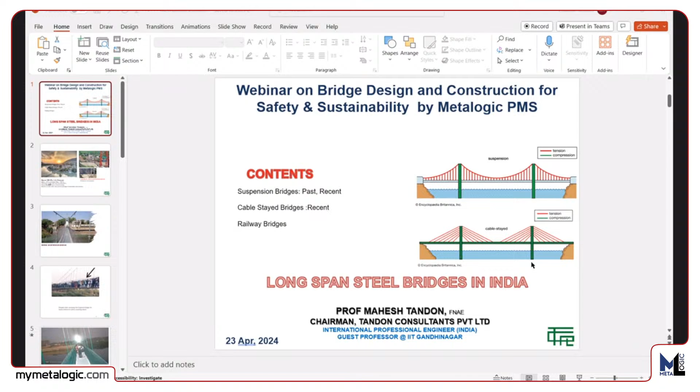So the first slide tells you basically what I'm going to talk about: some suspension bridges, past and present, cable stayed bridges of more recent origin, and of course a couple of railway bridges, which I think are of great value as far as webinars like this are concerned, because these are really outstanding structures in many ways.

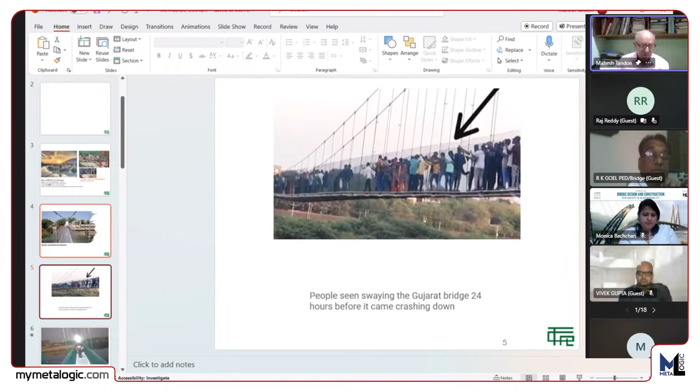It had already served its design life of about 100 years or more. This photograph was taken 24 hours before the collapse, because the bridge, which was under repairs, was opened only about 4 days prior to this. When you have a lot of people who don't realize that pedestrian bridges can't be played around with, you have to just cross the bridge and not play around with it.

Here's another group of youngsters, which you can see shaking the bridge. It is quite enjoyable for them, but it can prove to be a disaster, as it did in this case. This is a real live shot at the time of the collapse.

So why did the Morbi Bridge collapse? Probable reasons: corrosion of the main cable, fatigue of the same, and overloading. The present capacity that existed was 100 kilogram per square meter, which by today's standards is only about 1/4 or 1/5 of what bridges are designed for. But given all the problems that it had, even 100 kilogram per square meter probably was too much.

And of course, then there is the vandal loading, which I showed you, how the bridge actually collapsed with some youngsters trying to enjoy the swaying of the bridge. So that we call vandal loading. We cannot design bridges for that. It is difficult.

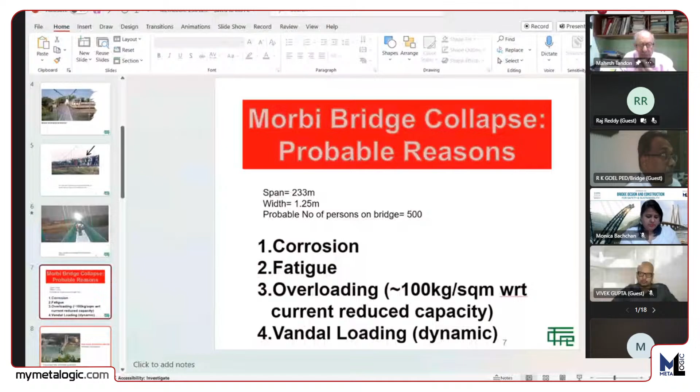The next bridge I want to show you is Ram Jhula Bridge, also in Rishikesh, Uttarakhand, constructed in 1986. The design is similar to Lakshman Jhula, located 2 kilometers upstream. The span is slightly larger, 230 meters, and the deck width is also larger, at 2 meters. The third bridge in Uttarakhand, Dobra Chanti suspension bridge, has a span of 440 meters, quite a big span, and a width of 8.25 meters, again quite large, and it is a motorable single lane bridge.

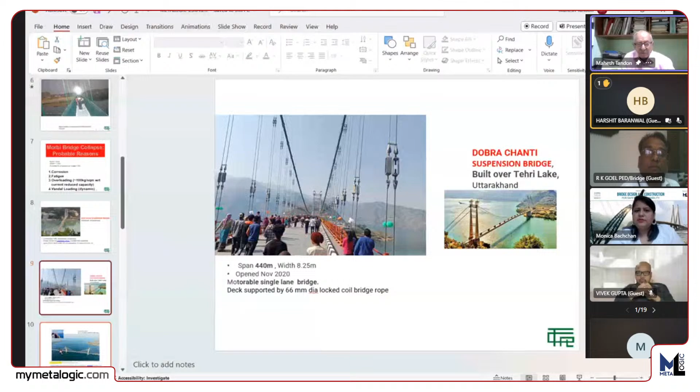As you can see, at the moment there are no cars or motorcycles or anything. It's basically pedestrians, but it is designed to be motorable also. So these are the three bridges I wanted to show you presently in Uttarakhand, and I think that when a bridge becomes close to its design life, it is better to close it down and treat it as a heritage structure rather than trying to extend its life and using it for other purposes.

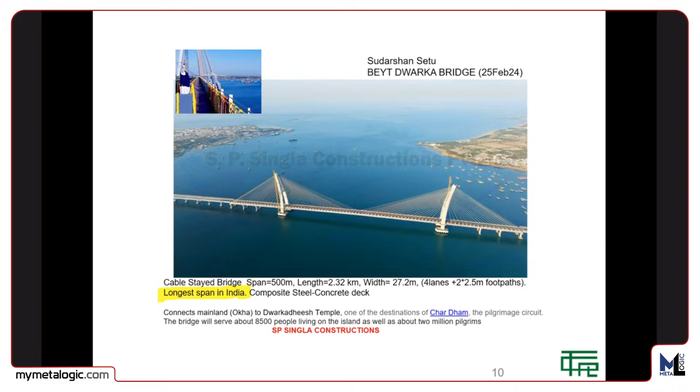Let's go to cable stayed bridges. This is the recently completed Beyt Dwarka Bridge, and you can see in the inset picture our Prime Minister waving out to the crowd, on the opening day. It is rechristened as Sudarshan Setu. This is the longest bridge span that we have in India today, 500 meters in length and 27.2 meters in width. So it's a 4-lane bridge with 2.5 meter footpaths on either side, because this is part of the pilgrimage circuit, what we call Char Dham. This is one of them.

The contractor, SP Singla Constructions, is one of the contractors who has made several long span bridges in the country.

I wanted to talk about what the deck is. All these bridges which have been constructed, particularly in India, have a composite deck. What does it mean? If you see on the right hand side top, there is a slide of the signature bridge in Delhi, which also had a similar deck. The picture below that, numbered 1, shows a grillage of beams as seen from the top, with a number of things poking out, as you can see from the grillage itself.

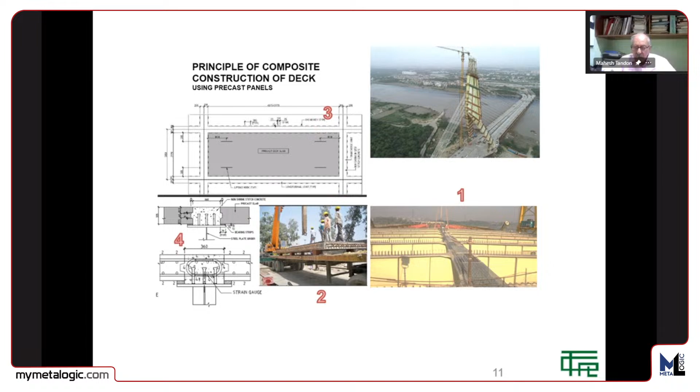The longest span is still under construction by the same company. This is the 6-lane, 700-meter span called the Delhi-Katra Expressway, which goes through Amritsar and so on. This is also one of the expressways which is going to be a sort of religious journey, with Katra coming there where you can visit Mata Ka Mandir. This bridge's construction has just started.

This is the old second Hooghly Bridge, which has a 35-meter wide composite deck. This is where cable-stayed bridges really started in India. When it started, it was a world record, but it took so long to construct that by the time it was completed, 3 more bridges had already crossed that span of 457 meters.

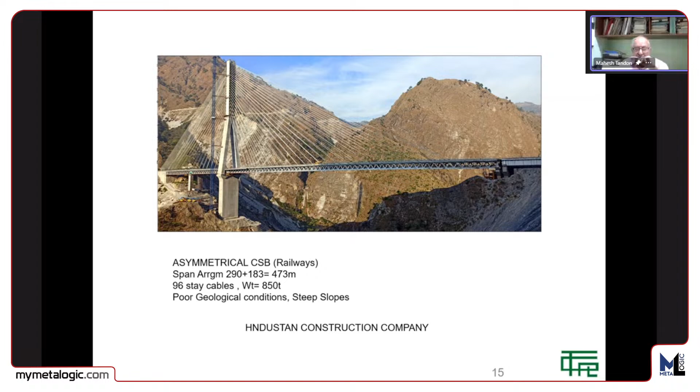I want to talk about 2 great railway bridges of India recently completed. This is an asymmetrical cable-stayed bridge, which has its biggest span of 290 meters, and the other span is 183 meters, with of course a support in between. The remarkable thing about this structure, apart from the fact that for a railway bridge this is quite a big span of 290 meters, is that poor geological conditions and steep slopes did not prevent railways from doing a wonderful job. The contractor was Hindustan Construction Company.

The last slide I want to show you is the Chenab Bridge, which I am sure you must have heard of. It is the world's tallest railway bridge, 360 meters tall up to the deck. If you compare it with other tall structures which we know well, the Qutub Minar, the Leaning Tower of Pisa, and of course the Eiffel Tower, which is 324 meters, you can see that it is dwarfed by the bridge itself.

This is a remarkable achievement. The way it was constructed was that it was cantilevered out, using a temporary stay cable at all times so that the arch could be completed. After the arch was completed, as you see in the last picture on the right hand side at the bottom, the deck was incrementally launched or push-launched from either end, and that is how the deck was made. This is again a remarkable structure, an achievement by the Indian Railways. The contractor was Afcons. Thank you very much for your kind attention.

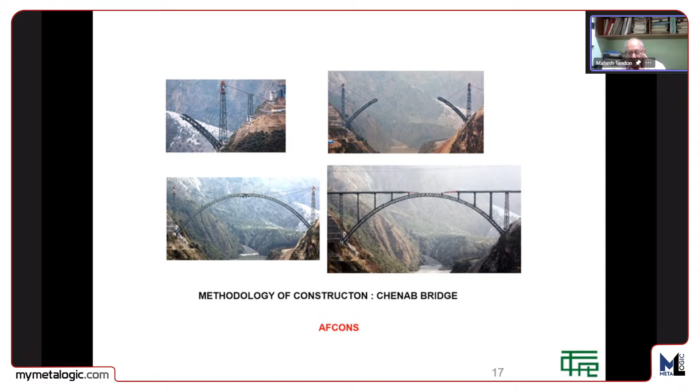Thank you, Monica. Am I audible? Yes, you're audible, and your slides are also visible. Please put it on. Please share your slide.

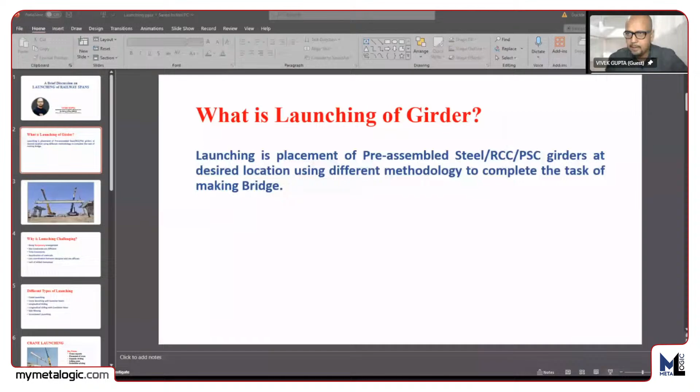Please put it on slideshow mode, Vivek ji. This is already on slideshow mode. No, we can see all the slides. Is it working now? We still can see the entire screen. From the menu bar, you can select slideshow. Here I have selected slideshow. No, but we are able to see the entire screen. Let me try it, yes. These are such important slides, nobody wants to miss any part of it. The audience is especially requesting this. You have worked so hard on these slides.

Please open your PPT, Vivekji. Is it on slide mode now? No, still not. You can see in the bottom right corner there is an icon for slideshow. Yes, otherwise I'm using that only. I think let's continue, otherwise we will lose out on time.

Now I'm going to start a brief discussion on launching of railway spans. First, what is launching of girders? Launching is basically placement of pre-assembled steel, RCC, or PSC girders at the desired location using different methodology to complete the task of making a bridge. So there are two things: launching, and erection of superstructure at the site only. Here we will mostly discuss launching schemes in which we launch the entire truss or bowstring girder which is pre-assembled, and one example I'll take which will be erected at site only.

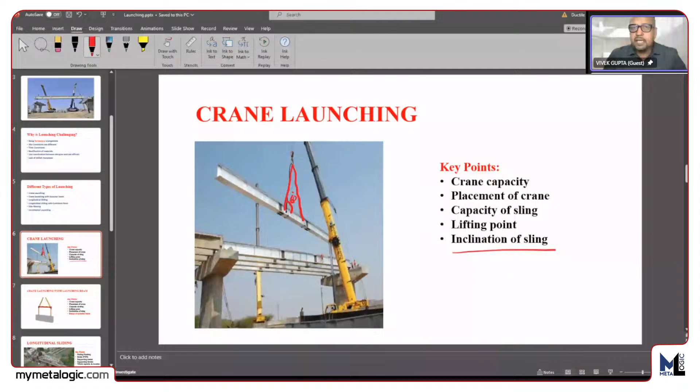So this is the way how we design crane launching. Second one is crane launching with launching beam, so here this beam is introduced. Now what is the purpose of this beam? This beam provides this angle at 90 degrees. In some cases, inclination affects this girder, so that's why to make it 90 degrees, we provide a launching beam, and the launching beam is connected to this inclined sling.

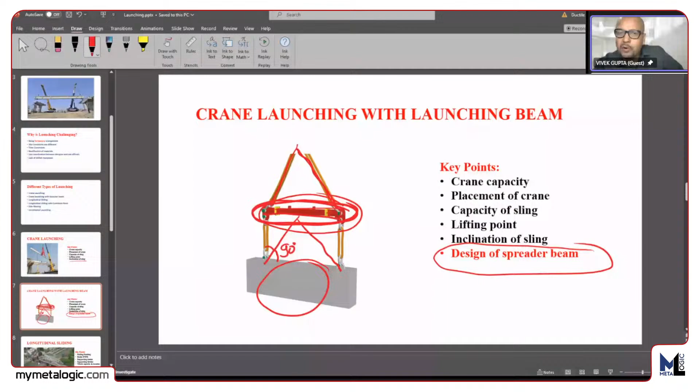So launching beam is designed. In this case, some key points are the same as crane launching, and only one thing is new here, that is the design of a spreader beam. This spreader beam is designed for bending moment as well as axial force. That much is more than sufficient for this launching beam.

Now third one is longitudinal sliding. Bowstring girder is widely used in the railways, and launching of this is one of the major things, and this is very important at every site, because at every site there will be site constraints as well as train movement. So these are a few important key points that we keep in mind while designing any longitudinal sliding. Longitudinal sliding means we are moving in this direction. So whether longitudinal sliding is by pulling or pushing method, it means we are pulling from here or pushing from here. Both methods are being used.

Second one is roller and PTFE. PTFE is the material which has a very low friction value, so we can slide it over the roller or on the PTFE. It is as per the site executive's requirement, whatever they expect, we design accordingly. Then supporting trestles. In this, these supporting trestles are designed, all of them.

So distance of these supporting trestles is very important, because we have to keep proper clear dimension from the railway track, and correspondingly load is transferred on this trestle, and this trestle should be properly designed to avoid any failure. Then supporting girder - this entire bowstring is sliding over one girder which is placed over supporting arrangement, so this girder is also designed.

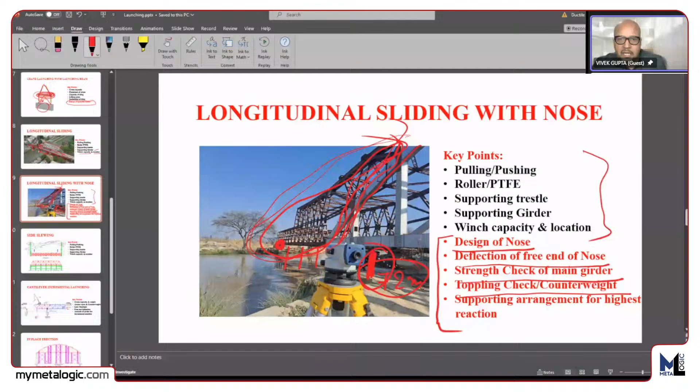This one is cantilever incremental launching, which we did for the Mizoram project. Here, one by one members are being attached, and this entire truss is under formation through cantilever action, and this blue truss is working as an anchor span or counterweight. So one by one we are adding members and we are making it long, and finally it will reach in this way - it will reach to the support in this way, and this portion behaves as an anchor span and counterweight, and these are the link members between these two trusses.

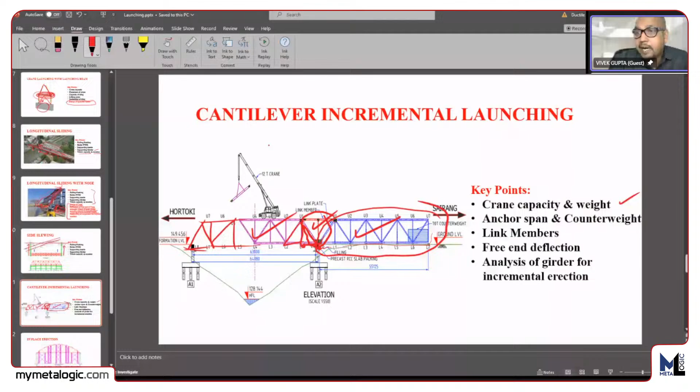This link member we properly designed by using analysis. So here crane capacity - this crane which we run over the truss, so its capacity and its weight is very important while designing. Anchor span and counterweight is very important. Link member design is very important, which is here. Free end deflection is very, very important, because after connecting all members, the deflection should not be very high, otherwise this will not be supported on the pier.

Then analysis of girder for incremental erection - this girder is basically designed for the simply supported condition, but we are launching it by making cantilever, so that's why cantilever analysis is also required in this case. Now, last one, this is not as such launching, this is on-site erection, and this is going to be executed on Krishna River, connecting one bridge, Telangana to Karnataka.

So this is one of the most important bridges of that area, an 83-meter span. The unique part of this bridge is that two portions are made up of steel, but all these members are cables. So this bowstring is made of steel members and cables.

Erection of this is being designed by us, and it is going to be executed very soon. This is not launching, this is completely erection work, because assembly will be done at the site only.

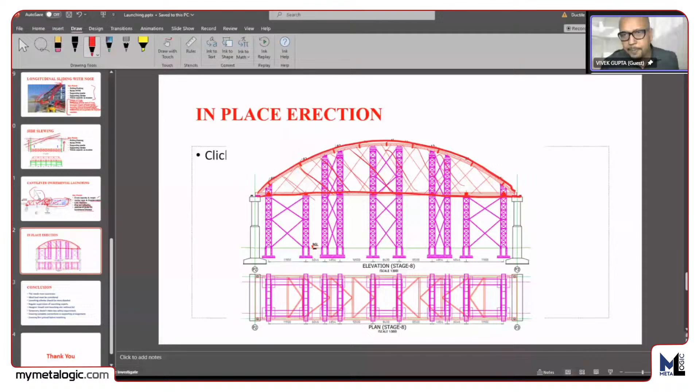Now, in conclusion, launching is really very important and very vulnerable, so it needs more awareness. In launching, wind load is very important because launching takes some time, and during that wind may come. If we lose consideration of wind while designing or analysis, there may be a chance of failure.

The launching scheme should be more detailed so that site people can understand the entire launching scheme properly and work accordingly. Regular supervision of launching experts is required, who can ensure all launching scheme key parameters are ensured at site. Then the designer should visit the launching site without fail. This is very, very important.

Temporary does not mean less safety requirement. This is one of the most important points I want to highlight. Temporary structure doesn't mean less safety requirement, because most of the failures are in temporary structures. Ensuring complete connection in supporting arrangements - I told you initially that at the place of 5 or 6 bolts, people are using only 2 bolts. So these are one of the major common reasons of failure in launchings.

And ensuring firm ground before launching, because settlement of the entire system is very common in the case of launching. People don't go for firm ground, and sometimes there is settlement. So these are the points about launching.

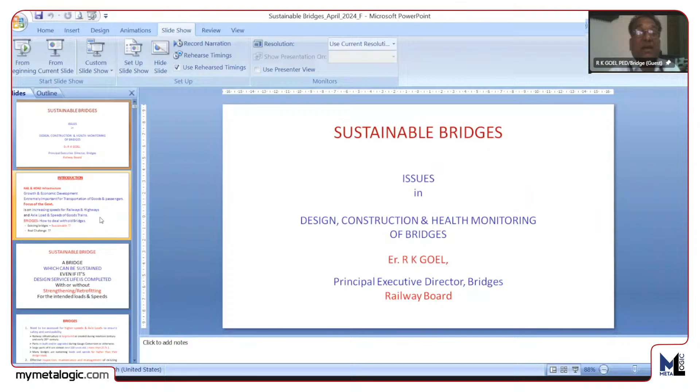Indian Railways, not only Indian Railways, even in highway sectors, there is an emphasis on growth. We have to increase the speeds, we have to expand the networks, and this is the focus of the government. So we have to think about the bridges, how to deal with them, particularly the old bridges, existing bridges. They have to be made sustainable, but how? That is a real challenge. So what is a sustainable bridge? A bridge which can be sustained even if its design life is completed, with or without strengthening or retrofitting, for the intended loads and speeds. So this is a real challenge.

Bridges need to be assessed for higher speed axle loads to ensure safety and serviceability, and they are largely old, as I've already told you. They have to be rebuilt or upgraded during gauge conversion. Many bridges were retained during gauge conversion, and we are running broad gauge traffic over those bridges, which were originally meant for meter gauge. A large part of them are over 100 years old, more than 25%, and they are sustaining loads and speeds far higher than the design loads. So effective inspection, maintenance, and management, that is the key. We have to do periodical and effective inspection and do whatever is required in those bridges as per the need. This involves many activities: condition assessment, safety assessment, testing, monitoring, strengthening, and rebuilding, etc.

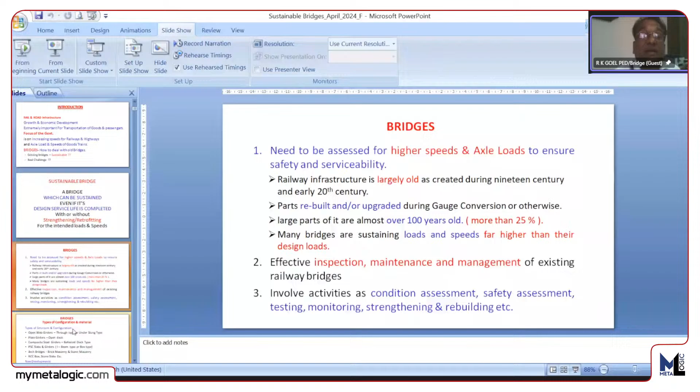My slides are moving. I think there is no issue in that. Yes, I think you are on the slide which says bridges, types of configuration, and material.

So the challenges are that we have got many different types of bridges, constructed in different types of materials, with different types of spans. All these together make it a very diversified stock that you are having. So there are open web girders, through type or under-slung type, and many more types within open web girders too. Anybody maintaining these bridges has to have a complete design understanding of these kinds of spans. Unless he has this design knowledge, he won't be able to do justice in maintaining these bridges, because he has to give the input at the required place. That will be the most effective way of maintaining those bridges.

So I have just narrated how many types of bridges are there; there may be many more types. New developments are coming, as we have recently seen bowstring arches—it's a new ROB in steel. We have got cable-stayed steel bridges. Professor Tandon has already given a presentation about the cable-stayed bridge in Anjikhad, and the steel arch bridges. Again, Professor Tandon has given the Chenab bridge example. So these new bridges are posing new challenges to us.

Why are old bridges to be sustained? Because rebuilding of large bridges is too costly, and there are a large number of such bridges—we cannot do that. So we have to have studies so that we can sustain these bridges, and that requires a lot of technical input. Rebuilding of small span bridges, though they are small individually, is large in number overall. Although they are small, we can rebuild them, but that requires traffic disruption. When we have to rebuild a minor bridge, we have to impose a speed restriction and need a traffic block to replace these bridges. Since the numbers are so large, the requirements of ETA—engineering time allowance—and the number of blocks required becomes very large. So it is better to sustain the existing bridges to the extent possible.

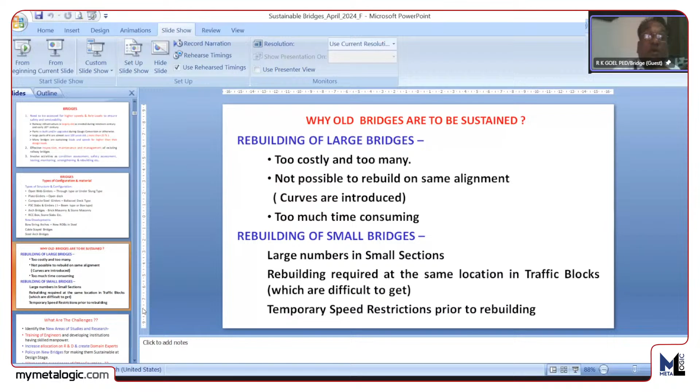So what are the challenges? We have to identify new areas of study and research, training of engineers, and developing institutions which have skilled manpower, because we need people who can do this job in a safe and satisfactory manner. We also need to increase allocation of R&D and create domain expertise within the railway itself, and then outside the railway also.

Then, a policy of making new bridges sustainable at the design stage itself. It is very important that when we make a new bridge, we see how it has to be constructed and then how it has to be maintained. And in case life extension is required, how it has to be done. And finally, if rebuilding is required, how the rebuilding will be done.

So what are the experiences of other countries? I will just share. Sustainable Bridges is also the name of a project which the European countries undertook in the first decade of this century, from 2003 to 2007. They had similar kinds of problems.

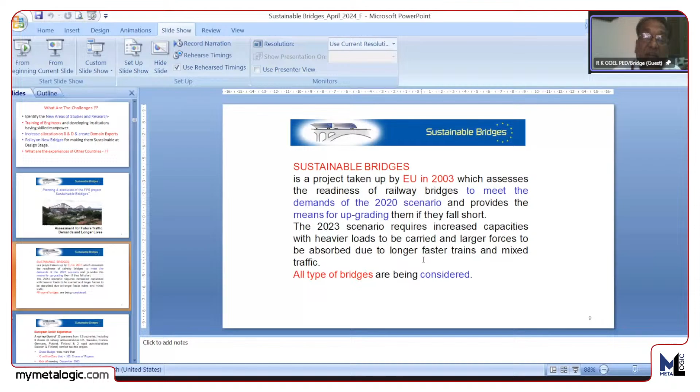They visualized the scenario of 2020 and wanted to make existing bridges fit for higher speeds and higher axle loads. So that was the brief detail: 32 partners, 12 different countries. Gross budget was about 10 million euros, that is 100 crores at that time. It was started in 2003 and completed in 2007, and reports were given in 2008.

I will just briefly give you the objectives of the project. The prime objective was to increase the transport capacity of existing bridges by allowing higher axle loads up to 33 tons and higher speeds of 350 kmph for passenger trains, and to extend residual service lives by about 25%.

To meet this objective, they thought about how to enhance the management, strengthening, and repair systems. This is the stakeholders' organizations - academicians, administrators, research universities, consultants, and all kinds of organizations which could contribute to the project. They were taken into the planning.

So this was a holistic job done. They divided the whole work into different packages: right from startup and classification, then guidance and review, loads, capacity and resistances, condition assessment, inspection, monitoring, repair and strengthening, then demonstrating field testing of bridges and monitoring of new bridges, and finally training and dissemination of knowledge, which is the most important part.

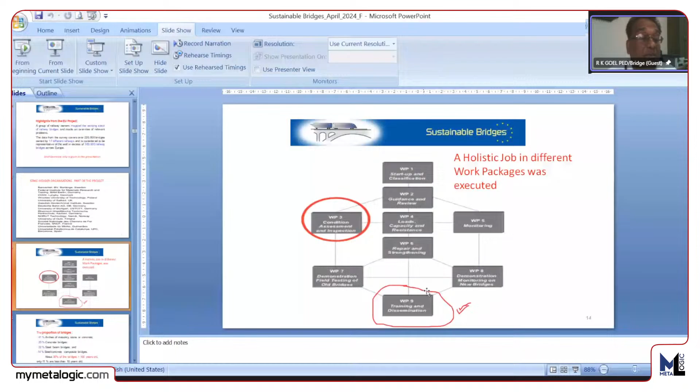The proportions of the bridges were more or less like those we have in our country. They also had more than 35% of bridges older than 100 years. So top priority research areas were identified.

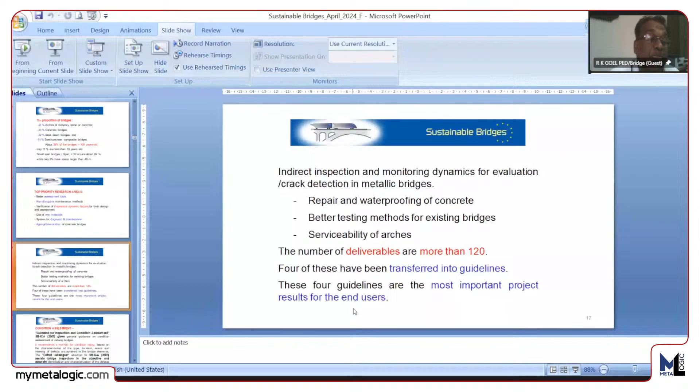Repairs and waterproofing of concrete, better testing methods for existing bridges, serviceability of arches. The number of deliverables was more than 120, and 4 of these deliverables were transferred into guidelines. These guidelines were the most important project results for the end users. So this was one of the guidelines.

Then the important thing they found during the project is that whoever is inspecting the bridge has to be competent and trained. In Sweden and Germany, for example, they specify the education of the bridge inspector - special inspection is to be done by a structural engineer and/or an NDT expert. Similarly, in Germany, a structural engineer plus certificate required, plus specialist support by inspectors. So this part is very important.

In the United Kingdom too, a trade examiner meeting the requirements of RTC - they have specifications the examiner has to meet: certificate required, qualification as bridge inspector required, professional knowledge required. So at every stage you need to deploy a person competent to do that kind of inspection. An integrated management system was proposed, including documentation, inspection, maintenance, knowledge-based databases, and a scientific approach for defect description, reliability, and deterioration modeling.

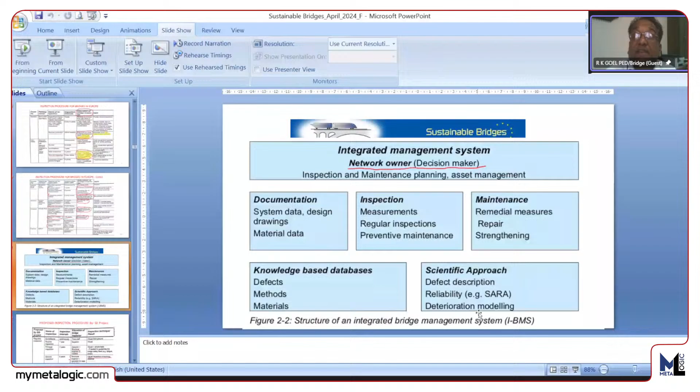Then specialized laboratories, if required, during special investigations. Then monitoring with specialized laboratories, again there is a requirement. Then digital implementation of inspection results into the CA, the condition assessment. So field reports should be available in a digital mode so that they can easily be accessed in case of need.

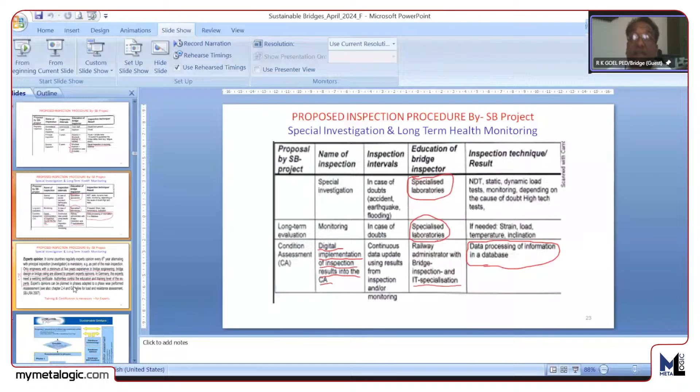This is the area where we are lacking in our country. We don't have experienced people in bridge engineering because bridge engineering is not being taught as a subject anywhere. Bridge design people are available, but mostly consultants, and they are over busy with their own works and cannot devote enough time as required. Similarly, for bridge rating, people are not aware about the bridge rating procedures outside the railways. Even in railways, very few people are actually aware about the bridge rating procedures.

This is the procedure that they have suggested for how to do the inspection in a sustainable and systematic manner, so that the bridge can be sustained. In the initial stage, if you have a doubt, only refer to the design drawings and the loads, and based on that take a decision. If there are doubts, then you go for detailed reassessment in phases: phase 1, phase 2, phase 3, and the last phase is the decision-making phase, where you may require to take a decision whether to continue the bridge with some instrumentation, downgrade it, or rebuild it.

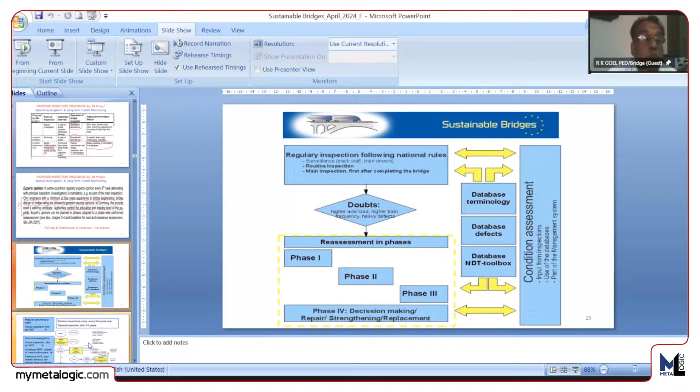This is again the same phase-wise procedure. This is the type of defects in steel bridges that they suggested should be categorized.

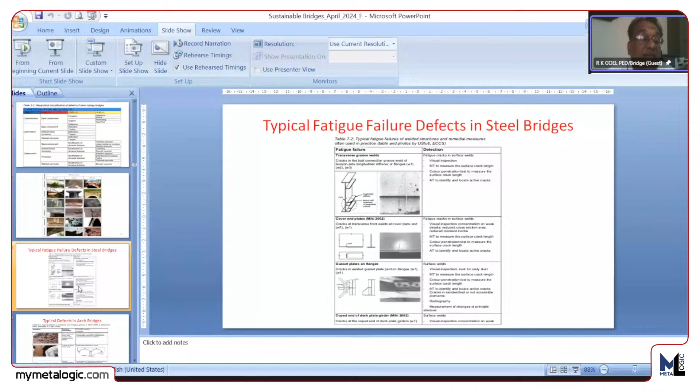Now I will show you some defects catalogs. This is on arch bridges, masonry arch bridges. This is on bearings. Again, for steel bridges, type of defects, fatigue defects, some more defects in arches, and this is in RCC.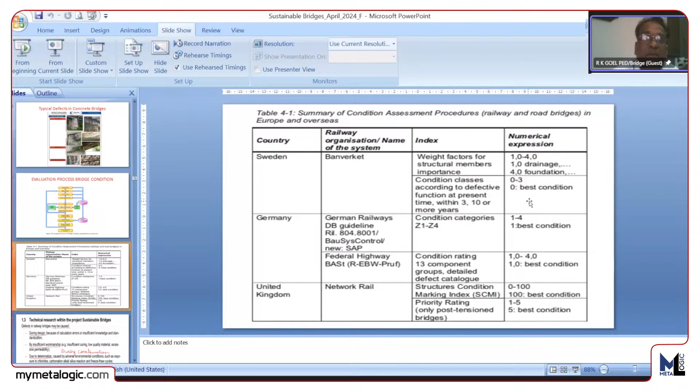Now this is the rating system summary of condition assessment procedures. They inspect the different parts of the bridge and give an overall rating number. Based on that rating number, they take a decision on what kind of repair regime is required for that bridge. So now I will show you technical research within the project Sustainable Bridges.

This is a very important slide. Defects in railway bridges may be caused during design due to calculation errors or insufficient knowledge and standardization. This is the area where consultants need to be concerned. When they design, they must think that this bridge is to be maintained for a sufficiently long period of time, say 100 years, and even after that it may need to be sustained. So if they leave any deficiency during the design stage, it will definitely reduce the service life.

Why insufficient workmanship? When we construct a bridge as per the design, the workmanship has to be of the highest order so that no defect initially left can multiply or manifest. And due to deterioration caused by adverse environmental conditions such as exposure to chlorides, carbonation, alkali silica reaction, and freeze-thaw cycles, all these things should be kept in mind by the designer when designing a bridge.

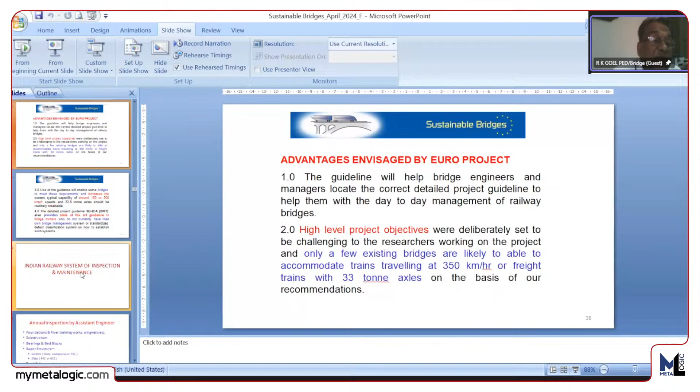Now I will immediately come to the Indian Railway System of Inspection. We have a similar type of inspection system. Foundation and all these parts are seen by our assistant engineer during the annual inspection. The frequency: superstructure routine inspection once a year, detailed inspection once in 5 years, and detailed inspection of bearings once in 3 years. A special third-party inspection is done as per need through outside agencies like IITs, NITs, etc.

This is the classification system. ORN number we give based on inspections. ORN number 1, if assigned, means immediate attention is to be given, a very rare case. ORN 2, attention is to be given within 1 year. ORN 3 is in a planned manner, a routine job we take care of so that the bridge is always in good condition. Then extensive monitoring till rebuilding is required, and a complete record is to be maintained.

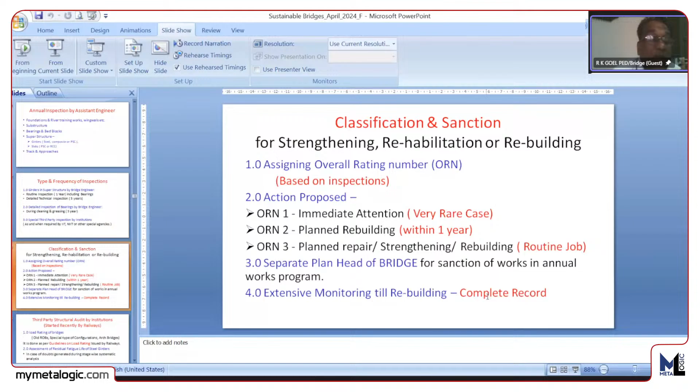So these are the third-party audits that we undertake on bridges where we have some doubts. Mostly ROBs we have been giving for third-party audit.

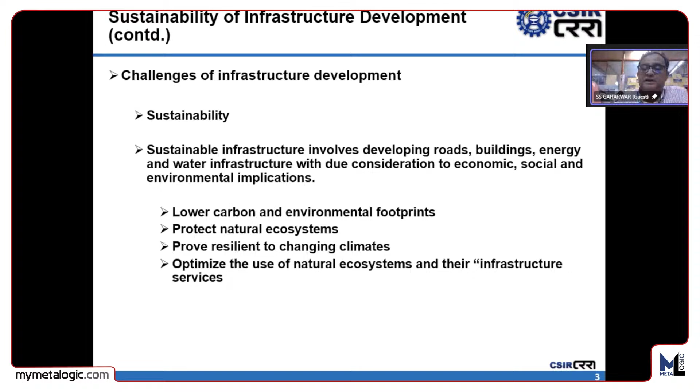So these are the things, and definitely linked are a number of developments also in terms of optimum innovative design based on limit state, then modern construction practices and the use of innovative materials. That is the new upcoming trend, but it also has limitations. What are the limitations? Construction practices still mean a 50% share of manpower and machinery, then unskilled manpower, that's a problem. And quality assurance, both during the construction stage as well as the O&M period.

What are the effective solutions through technology intervention? Use of modern non-destructive testing during the quality assurance construction period, and second is the instrumentation for health monitoring. That is the present topic for my discussion.

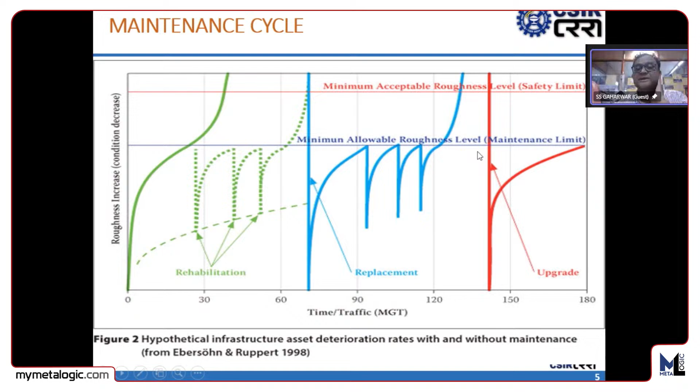So this is the outline of that, starting with the maintenance cycle. This is a typical maintenance cycle touching the threshold, and of course in between, rehabilitations are given which can extend the life cycle. Similarly, when it goes to replacement, this is the rehabilitation cycle, and this is the upgradation cycle. Health monitoring is a very similar analogy to the human body.

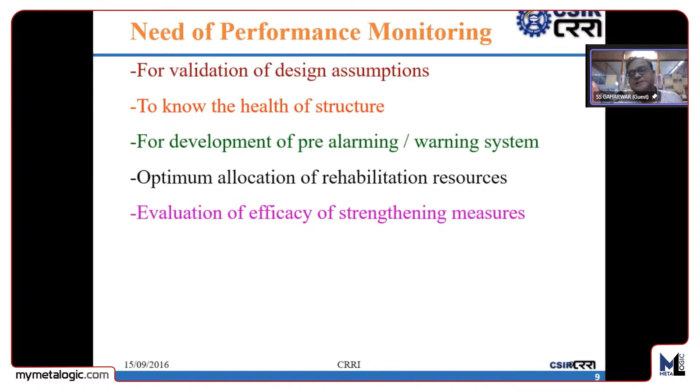So this is the need for performance monitoring: validation of design assumptions since new types of innovative structures are coming, the requirement of assessing their health at various stages, pre-alarming warning signs regarding the safety of the structures, and the allocation of rehabilitation resources, and definitely the efficacy of the rehabilitation scheme, especially when it goes to external pre-stressing—then health monitoring plays a vital role.

Now, starting with what to look for in health monitoring: basically, it is the symptoms, the performance factors, performance parameters as applied by analogy to the human body—strain, deflections, stress, tilt, vibration, temperature, crack, corrosion of reinforcement. So basically, the analogy says that these are the performance parameters.

Once we have identified it, then you have to put the sensors right from the construction stage and keep on monitoring, keeping in view the lifespan of the structures. So there are various technologies as shown here.

There are electrical resistance-based sensors, electrical strain gauges like that. Vibrating wire sensors are there, fiber optic sensors are there, and recent is the piezoelectric sensors.

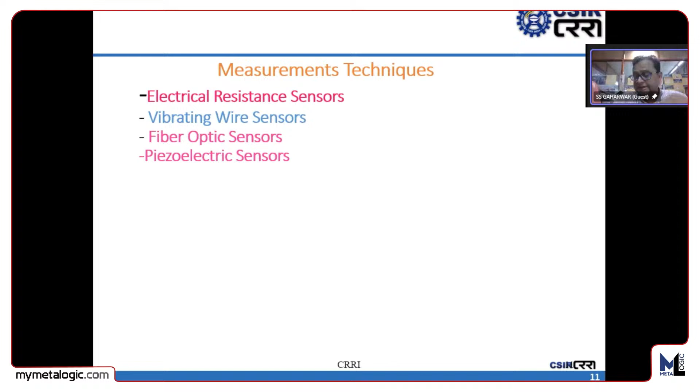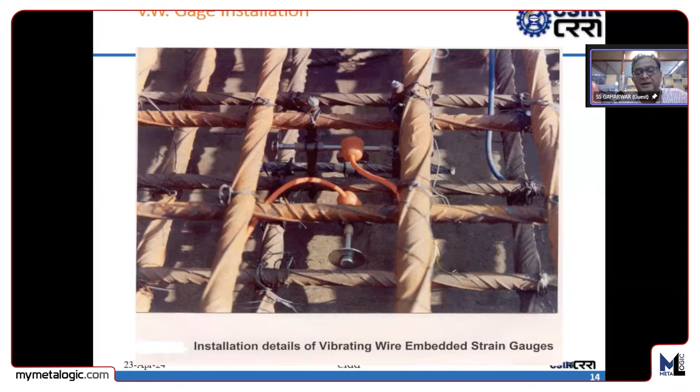Of course, the rosette is there, and the leads of those vibrating wire strain gauges come out and get connected to a data acquisition system, which is ultimately connected to a master computer. The master computer, through wireless, or if it is inside the box cell of a bridge, through wired technology, transmits the data to the various data collection centers.

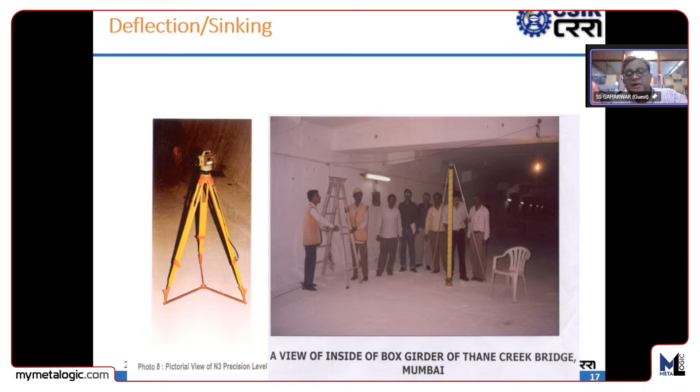This is another vibrating wire temperature sensor installed in between the reinforcement before construction. And this is the inside view of a box girder, the N3 precision level, which has a very sensitive least count, just for measuring the deflection of the profile.

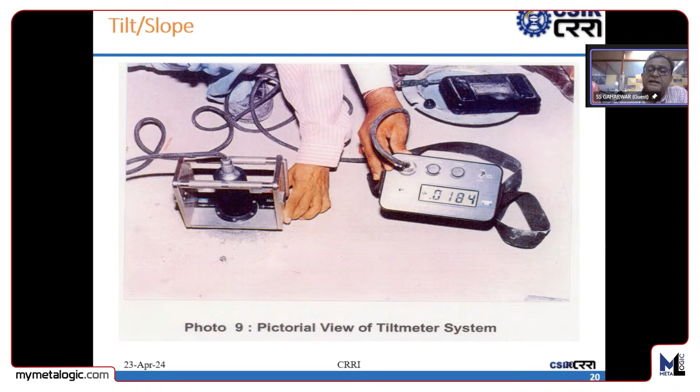This is another sensor, the tilt meter, which works with the help of the accelerometer principle. This is another sensor, the inclinometer, which is used just to see the inclination. This is the working principle, especially very useful while the sinking of a well is concerned. This is the sensor, and this is how it moves.

This is the vibrating wire surface mounted sensor, where the opportunity of installing in the pre-construction stage is gone. Even in post-construction structures, we can install that. And this is the surface mounted mechanical sensor. The performance parameter in this case is the strain.

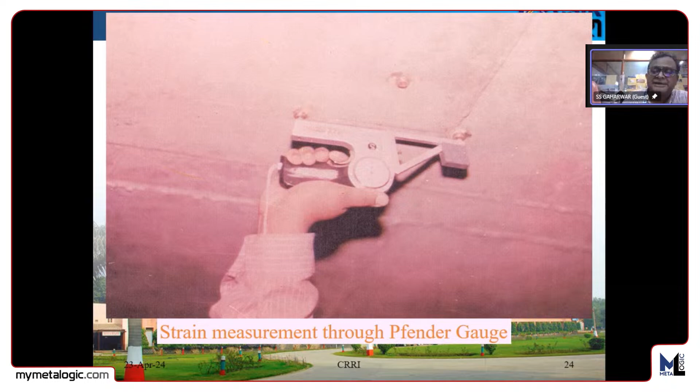So when it applies to health monitoring or instrumentation, the algorithm naturally starts with the selection criteria of the sensors, and the suitability of embedment in concrete. I showed 4 types of technologies. Electrical sensors are of the ready-to-use-and-throw type.

For example, electrical strain gauges, particularly when you are conducting a load test on a bridge and repetition is not required, those sensors are applicable. And when it is long-term monitoring, where your objective is to monitor for 25 years, 50 years, then vibrating wire sensor technology, which is maybe relatively old, is very promising, since the transmission of the data has no much distortion.

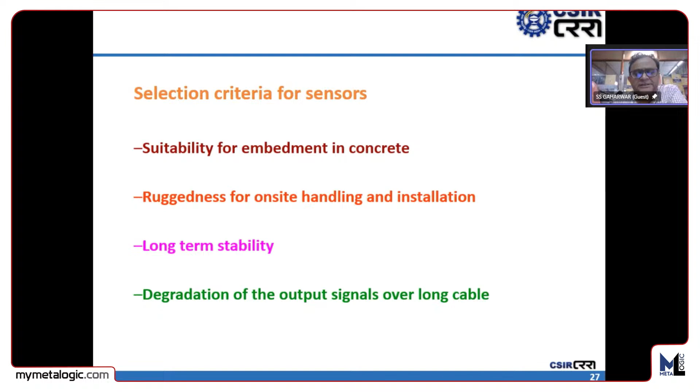Regarding optical fiber sensors, yes, they are very advanced and very much in use, but the only thing is they are less robust compared to vibrating wire sensors. And regarding piezoelectric sensors, the response is in terms of enormous data, and that interpretation is a challenge. So still, despite being a relatively old technology, vibrating wire sensors working on these principles are still in use.

These are the performance parameters. Now let us see a typical instrumentation scheme, how we design the instrumentation scheme. Everything is linked with the finance. The instrumentation was sometimes considered a cosmetic item.

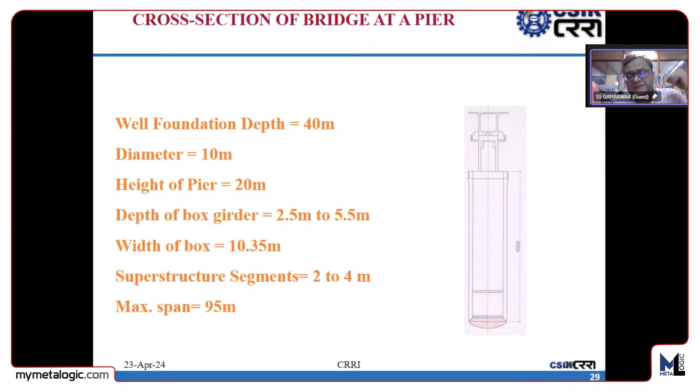Now, slowly but surely, as people realize the importance of that, they are making it an integral part of the whole construction and maintenance process. So this is just one example to get a feeling of what instrumentation is and how the instrumentation scheme is designed. This is a well foundation showing the various dimensions.

Now, we have to keep the cost of the instrumentation optimum so that it can be widely adopted. So we need not instrument each and every section. We have to be selective depending upon the criticality of the locations and the performance parameter. So this is one typical example.

Performance parameters: lateral earth pressure cell, longitudinal and hoop strain. These are the performance parameters identified, and these are the locations. This is the plan we are seeing, showing the locations of the sensors.

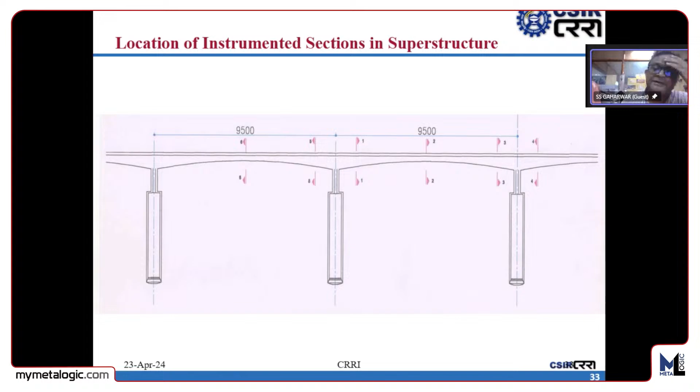Again, these are the sensor locations here and here. As far as the superstructure is concerned, the center of the span and proximity to the piers are considered to have significant bending moment effects and torsional effects, so they are selected. This is one typical instrumentation scheme of instruments embedded in the superstructure.

You see the number of sensors, but this is the optimum number, and here's how we select it. These are the details: temperature sensors, corrosion probes, as well as strain gauges. Here is another view of the superstructure.

Now, monitoring stages: at what stage should monitoring be continued? Suppose we get the opportunity before concreting, so we have to install the sensors with the reinforcement of the structure so that after concreting, it becomes an integral part of the structure. These are the various important monitoring stages.

When I say how to link this with the safety of the structure, needless to mention that nowadays, innovative designs are also coming. Sometimes the supporting system, in terms of girders, launching girders, and so on, need to be cautiously moved, and we don't know what the threshold of that caution is.

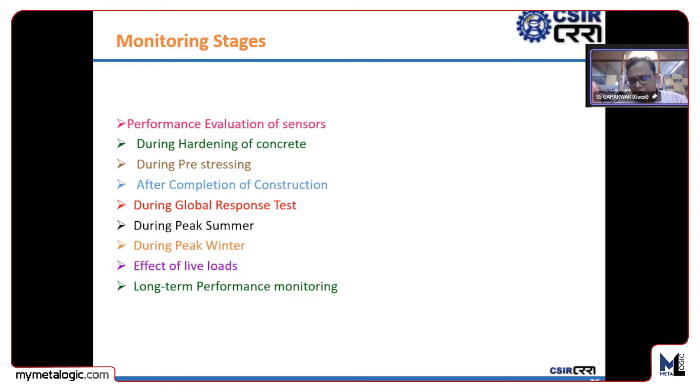In that case, if sensors are embedded inside the concrete section, their response can be received and compared with theoretical results. One can then put control over the effect, whether it is going constructively, positively, or reaching alarming stages. So these are the various monitoring stages.

And this is the rich experience of CRRI. We have installed instruments and successfully monitored various bridges as shown here. Of course, the majority are highway bridges, but we have also monitored a number of railway bridges.

Once the sensors are installed inside the body of the structure, this is the typical response. You see the number of sensors systematically numbered, and these responses are continuously recorded in the master computer. This is the deflection profile of a simply supported girder, with sensor details and typical deflection limits shown along the span.

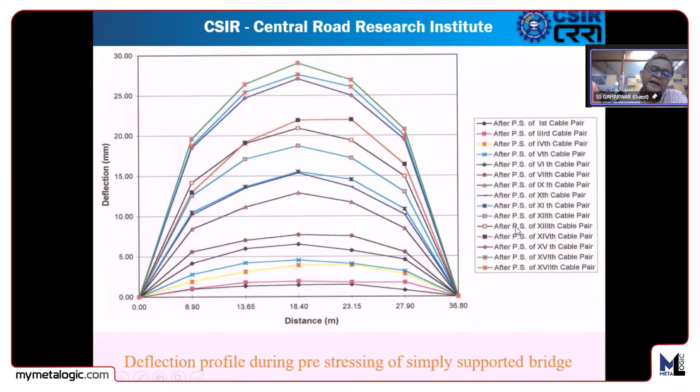So we can get the pre-stressing response of the cable pairs. At different stages, we can observe the response of the span. This is a simply supported span getting hogged up during pre-stressing.

This is another view of the sensor results, showing the value of the performance parameter being continuously monitored. This is the temperature response, showing temperature sensors in this single cell box girder span superstructure. These are the sensor positions, and these are the readings.

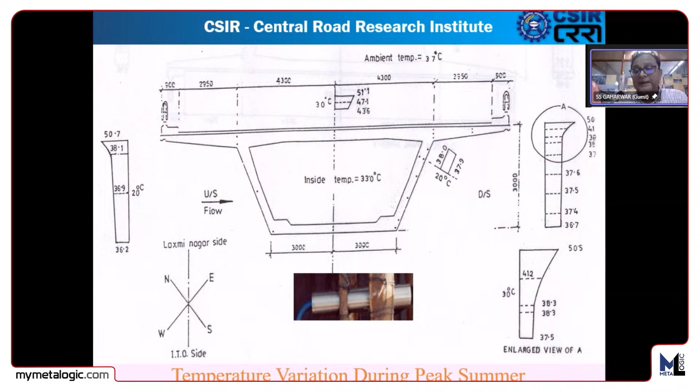This is the differential temperature profile, and it reminds me of the era before 2000, when IRC did not have a differential temperature gradient specification. Based on this data, the IRC differential temperature gradient was designed. This is a significant contribution.

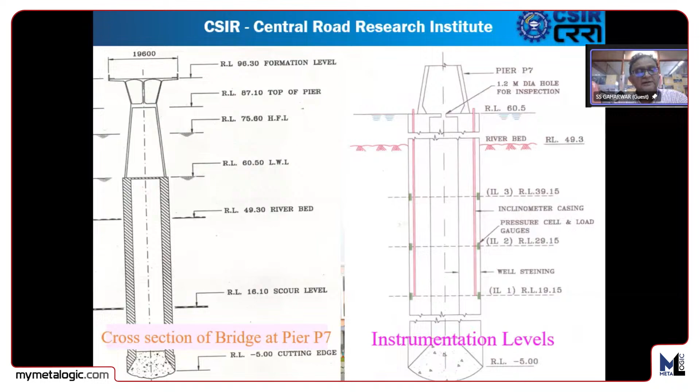Yeah, so this is the earth pressure, sir. This is the inclinometer position. These are the various thresholds, and this is the model updating technique combined with the field data, using the input field data.

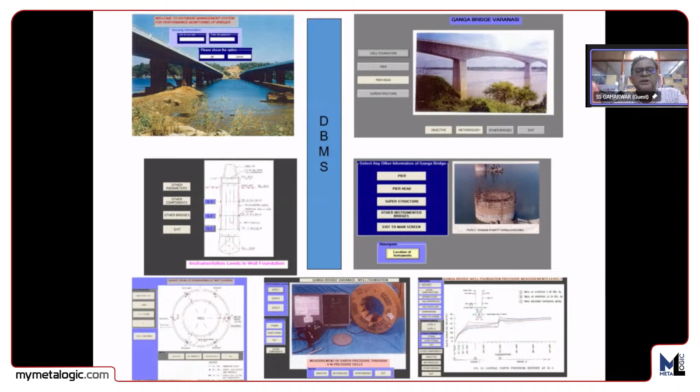This is how the enormous sensor response gets processed through a bridge management system, and these are the various parts of that system. CRRI has developed one bridge management system, with various monitoring schedules and a GIS environment.

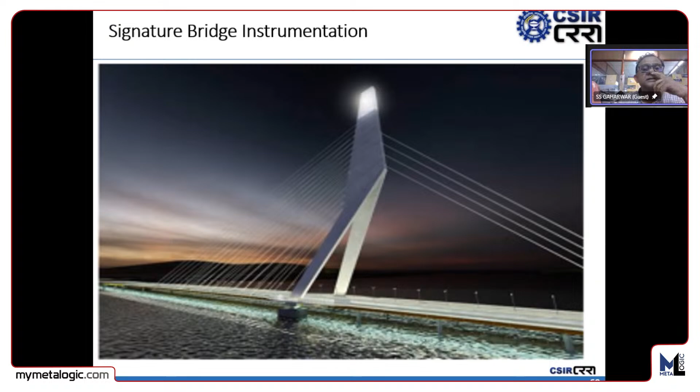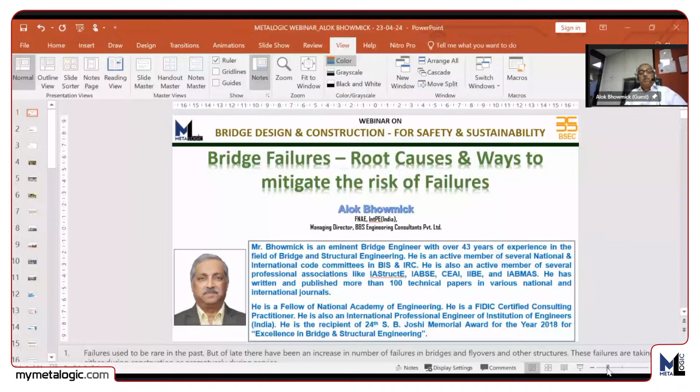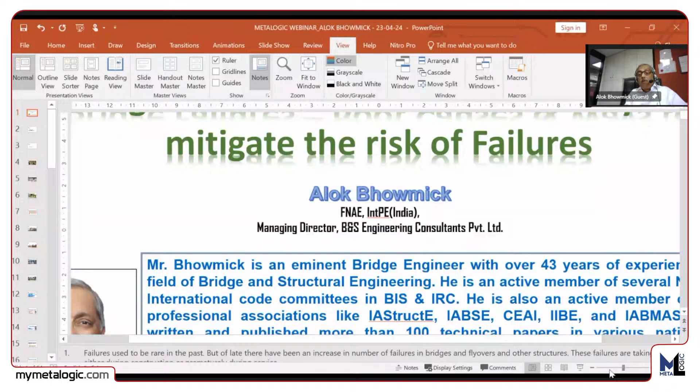Is it okay now? Hello? A little, you can increase the slide size, you can zoom in a little bit. Are you not able to put it on slideshow mode? No, I am able to put it, but you are not able to see, that's the problem. Okay, I have put it in the slideshow mode now. Is it visible like that? I think now it is. It is visible, but the slide is not completely coming, it seems too zoomed in. A little more zoom out please, sir. I think this is fine. Yes, this is okay.

Good afternoon, I know the time is constrained so I'll move very quickly. The topic of my presentation is bridge failures, root causes, and ways to mitigate the risk of failures. The theme of this webinar is safety and sustainability, and we cannot complete this webinar without showing the elephant in the room, which are failures. These failures used to be quite rare in the past, but of late there has been an increase in the number of failures, not only in bridges and flyovers, but also in other structures.

And these failures are taking place mostly during construction, but there are premature failures as well during service. The primary reason for this increase in the rate of failure, I would say, is attributed to the fact that we, the structural engineering fraternity, are not really getting into the root cause of the problem. We are not learning lessons from the failures. Most of these post-failure investigations actually bury the cause, and therefore the engineering fraternity is not learning anything.

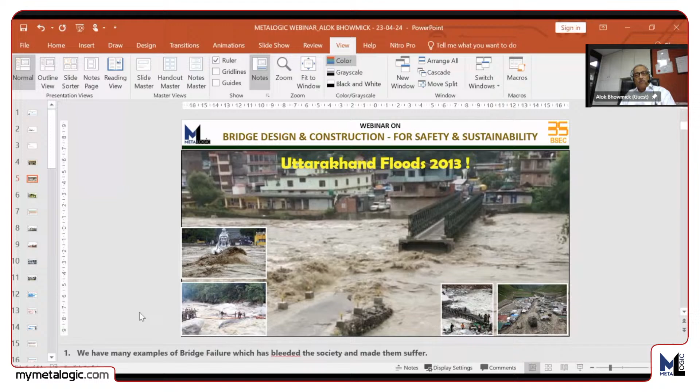Many of them would have used those pedestrian bridges for children to go to school or for the menfolk to go to offices, and the connection is lost. Till now it has not been restored properly. Even now, the work is going on to restore. When bridges fail, the community struggles, development stagnates, and the people suffer.

What you see in this slide is only a reflection of how people struggle to cross a stream or a gorge in case there is no bridge. So that's the importance of the bridge.

In the last 30 days, we have seen collapse of about 4 bridges which are in the news. There may be many hundreds of other failures which are not in the news and have gone unnoticed. But we have witnessed these, just to give an example of how frequent these failures have been.

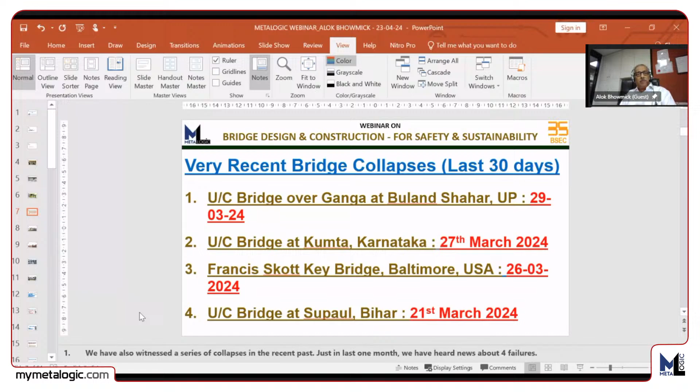This one, which happened on 29th of March, is in UP, in Bulandshahr, where I think it's a staging collapse which led to an under-construction bridge collapse. This happened only on 29th of March. Then we had a failure on 27th of March, just 2 days before, again a failure during erection in Karnataka, where I think there was some casualty also. We have all seen the spectacle of the Baltimore bridge collapse in USA.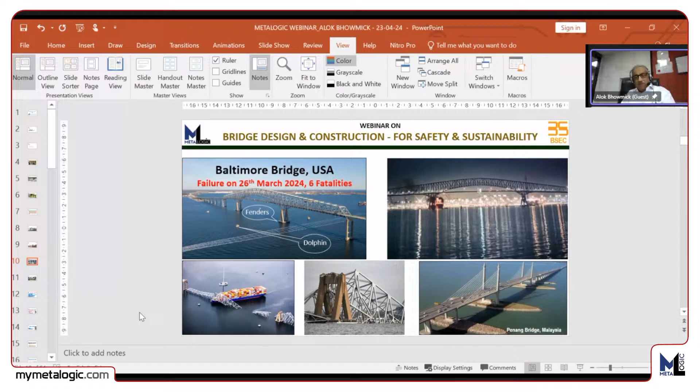So failures are not just India-centric, and this is a disproportionate collapse. Just one particular pier is hit by a barge ship, and that caused the collapse of the entire length of the bridge—more than a kilometer portion of the bridge just brought down.

Then we have also seen one failure on 21st of March in Bihar, where during the launching operation, a bridge under construction collapsed because of the failure of some portion of the launching, and there was a casualty also. All this reflects that a lot needs to be done in order to ensure safety and sustainability, which is the theme of this webinar.

Why are we not learning lessons? There are many reasons, and I have just put a few. The primary reason, I feel, is basically a lack of intent by authorities.

We are a tolerant society. Whenever there is a failure, unless it comes to the media, the attempt is always to bury it under the carpet. If the media comes in and it is flushed out, then the attempt is to find a scapegoat whom we need to put behind bars or blame. And mostly it is the weakest in the link who is being targeted. There is a fear of blame, a ruined reputation.

So both contractor, consultant, and authorities all work together to ensure that this is not published. And there are many other things, but I don't want to go through the whole list—the time is short.

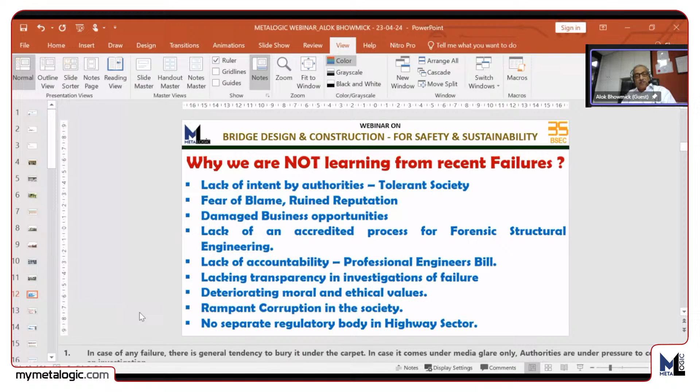What we'll find is that in India there is a lack of proper accreditation of forensic structural engineering. This part of forensic structural engineering is a subject by itself. Many times in investigations—and I've been part of many, including on the other side where I was investigated, so I've seen both sides—what I find is a lack of professional approach in forensic structural engineering. It's a subject not taught in our institutions.

If you want to do a proper investigation, you need not only knowledge of the subject but also a good understanding of the techno-legal system and the contract, and on top of that, proper engineering intuition so you can understand the real cause of failure. That's a fascinating subject, but it is not being taught. I think it's time we have forensic structural engineering as a subject, a discipline, in civil engineering in our institutions.

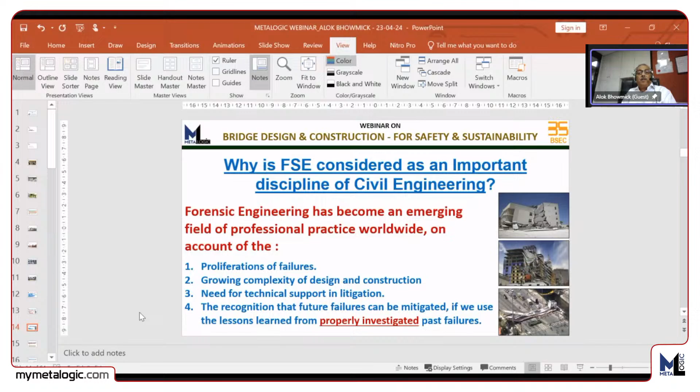Interestingly, it's not only in India but in many countries that forensic structural engineering is not taught properly, barring a few like the USA, where it is a subject. Very recently, there has been a survey conducted by the International Association of Bridge and Structural Engineering. Fabrizio Palmisano and his team, the task group, conducted a survey on the practice across 22 countries, including India, and how this needs to be improved. It's a very interesting paper in IABSE, and I would recommend everybody to go through it.

Essentially, forensic structural engineering is a fascinating professional practice that requires good technical knowledge, a good record of experience on the subject, and it's a multidisciplinary thing. When there is an investigation, you need to tie up with many other experts and then come out with the judgment. You need to have a good passion for the subject.

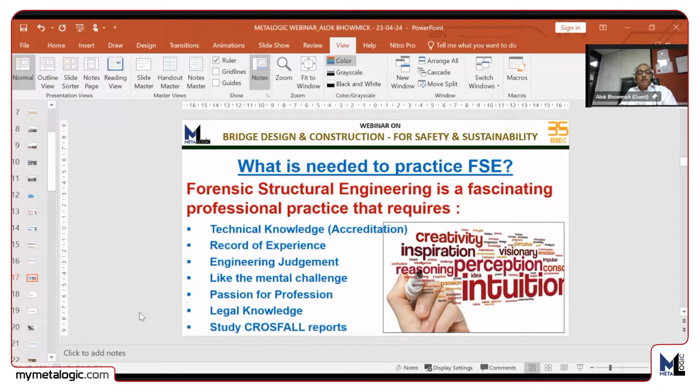Now, Monica ji, if you permit me, I can go to the failure case study. Otherwise, I can drop it and go to the newsletter. If the time permits, if you give me 5 minutes, I can go through one case study. Only 5 minutes, please. Only 5 minutes for the full, then I skip the failure case study. Okay? Yes, sir, sure, okay.

So I will skip this case study because that was not the intent of the failure case study. I will skip it and go straight away to the newsletter.

So now let me talk about a newsletter which has been initiated by Indian Association of Structural Engineers, that is IAStructE, and that is called CROSFALL. What is CROSFALL? CROSFALL is a confidential reporting of structural failures and lessons learned, and it is a quarterly newsletter published by IAStructE. For those who may not be aware, IAStructE is a professional learned society in India with the prime objective of supporting and protecting the profession of structural engineering by upholding professional standards and acting as a mouthpiece for structural engineers in India.

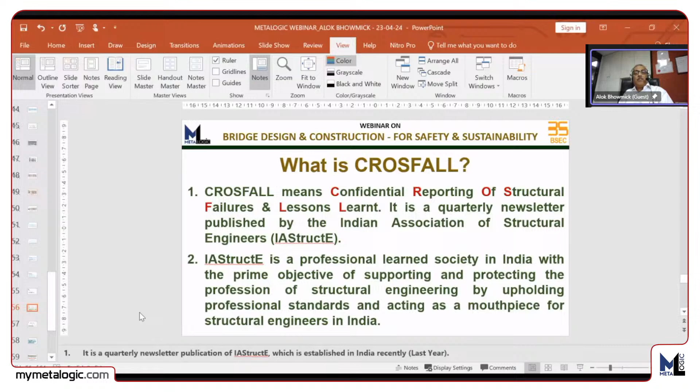What CROSFALL does is basically confidential reporting of failures. Anyone can report, give a confidential report. He or she doesn't have to name himself, doesn't have to name the project or the client. You just describe the incident, the cause of failure, what should have been done, what lessons we learned, and we will publish that report. It's a free e-newsletter; you can go to the website of IAStructE and download it.

The benefit of having confidential reporting is that it provides an opportunity for the engineering fraternity to learn from the experience of others. You don't have to necessarily commit the mistake to learn. It acts as a tool for bringing in change in codes, standards, specifications, and practices. It's a source of learning for students, academicians, and researchers.

There is no blame attributed to anyone because we are not targeting anybody, therefore the reporter feels free to share the facts, and the truth comes out in such reports. It's a very proactive system. It identifies precursors and tries to prevent failures through good detailing, learning from others' mistakes, and improving upon the design. It acts in the interest of the public and society.

So far, we started this in 2022 and some 7 issues of CROSFALL have been published so far, with 24 case studies presented across these 7 issues.

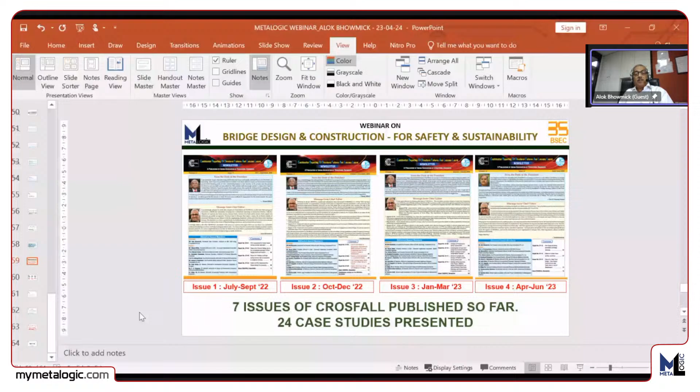So I will conclude by saying that the whole ethos of engineering should be about delivering solutions which provide benefit to society. This can only be done if we structural engineers not only earn public trust but also retain it by showing that we care, and we must take responsibility for our work and be accountable.

Unfortunately, in India, because of lack of any regulation of our engineering profession, many of those who commit serious blunders causing failures go scot free because they are not accountable. If it's an EPC contract, the contractor is primarily responsible to the client, and the consultant is indirectly responsible. But in many failures, it's not like the medical profession, chartered accountant profession, or lawyer's profession where there is regulation, and any error by a doctor can get his certificate cancelled. That doesn't happen with engineers, and that's where there is a lack of accountability.

So we must create an environment which allows us to consider what could go wrong. Therefore, in case of a failure, without apportioning blame to anybody, we must do a proper analysis and derive conclusions as to what lessons we have learned from the failures. I think CROSFALL provides such a platform where we can do that.

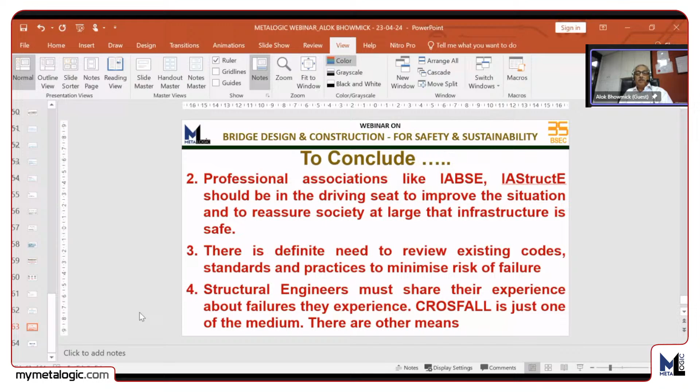Professional associations like IABSE, IAStructE should be in the driving seat to improve the situation and reassure society at large that infrastructure is safe. There is a definite need to review existing codes, standards, and practices to minimize the risk of failure. Structural engineers must share their experience about failures they've encountered, and CROSFALL is just one medium among many others.

With that, I conclude. Over to you, Monica ji.